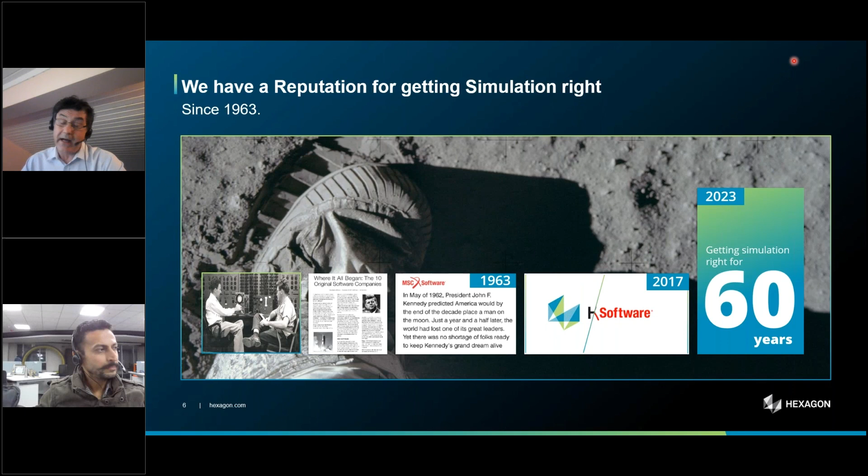If it was 60 years ago, the Apollo program, landing on the moon and getting the people safely on the moon and back, or if it's today to launch a successful product into the market, manufacture it, and operate it in the market, simulation is always there to actually make things successful, and not so much in creating nice, cool, fancy videos, which of course is also quite attractive from time to time.

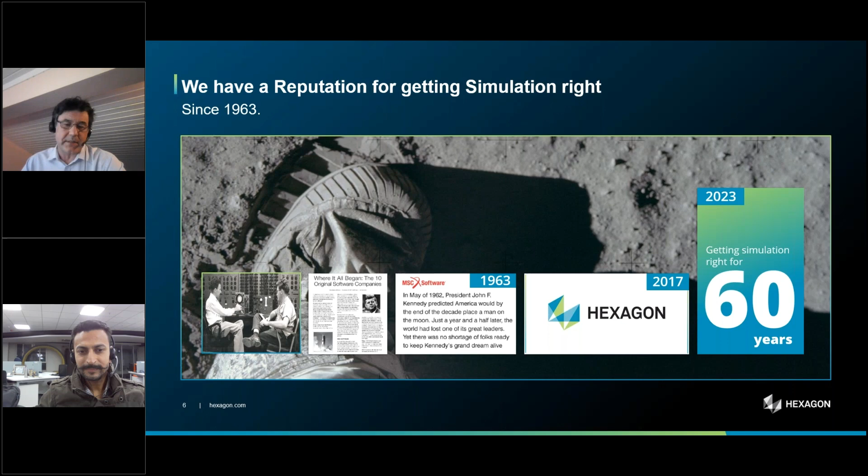Okay, with that, going to the next slide, what we're seeing right here is that simulation becomes more and more integral into the whole business processes of our customers. That means we are integrating into design, into making, into manufacturing, into inspection, and also into operations. What that also means is that simulation, and I'm noticing that in all the dialogues we have with our customers, is getting closer to the physical world.

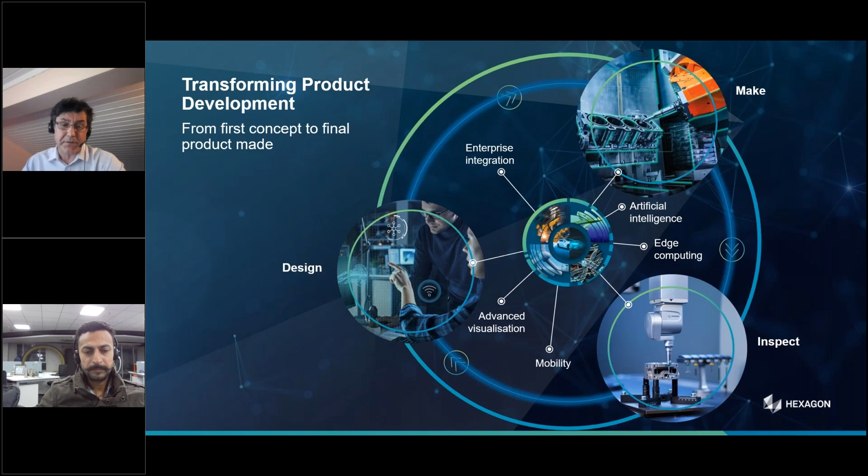It's not anymore something isolated in a lab, but something which integrates more and more with the physical world going forward. And that's something which we are looking into with our ecosystem, which we're building up with Nexus. If we go to the next slide, Ashok. Now, as you all know, Hexagon D&E has a huge portfolio of different simulation applications, which we are bringing to the market. And if you can go to the next slide, there are quite some impressive simulations in very diverse areas which we can do.

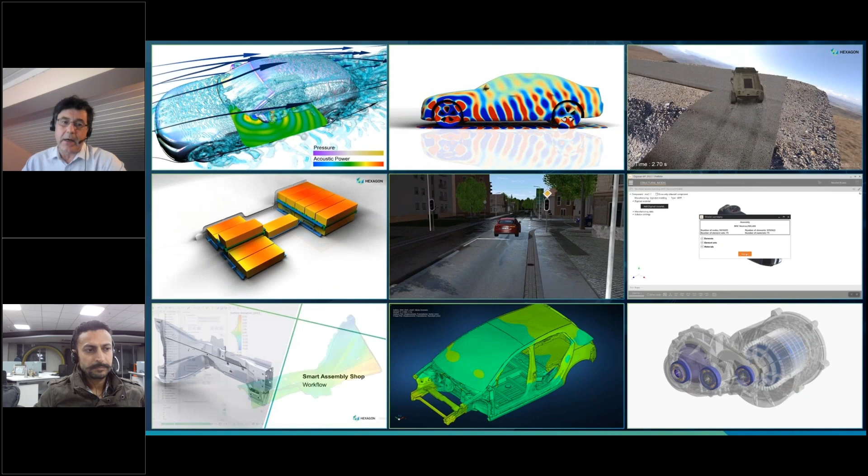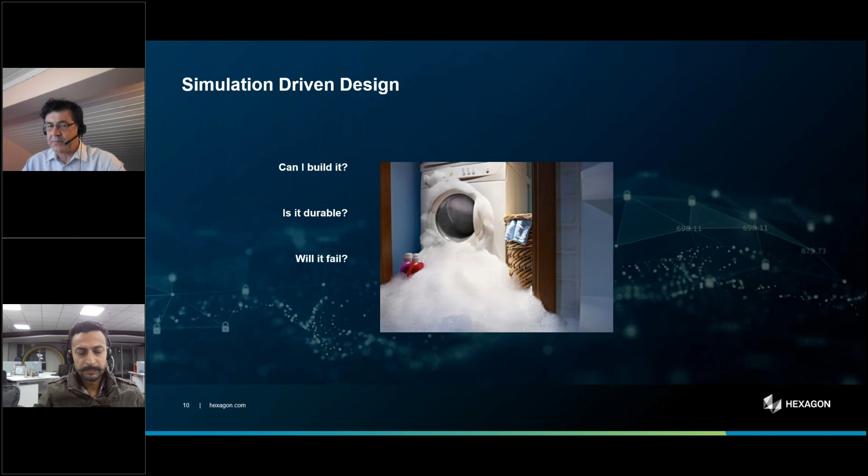Now, this already is one of the key things which I do want to point out. Simulation is actually very diverse because it's answering very many different questions. And we go to the next slide. That is one of the first challenges we see when building a simulation data and process management system. You need to immediately think about the multidisciplinary nature of this application, because it will not be as homogeneous as you can imagine.

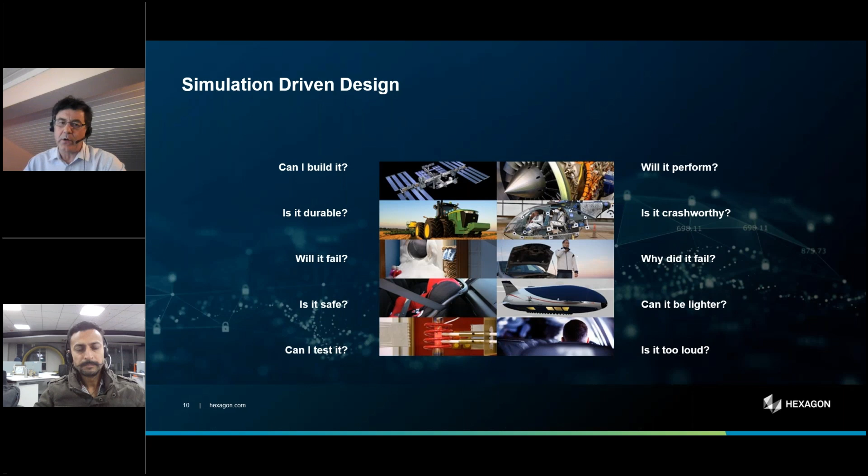Depending on the question, the domain, the application, the workflows you're using, there are quite some diverse requirements which need to be brought under one hood, under one organizational structure. And that's really what we have worked on over the past 20 years, where we had very many successful deployments and where we believe we know exactly what the key points are to make an SPDM system successful.

One of the slides I always use, and some of the people who have witnessed my presentation will remember that slide, I'm always using it, but I do want to point out one key part of simulation within the whole product lifecycle management of the system: running a simulation requires in the manufacturing world two ingredients. It requires from the PLM a requirement or an objective, and it requires from the PDM some kind of information about the product.

It doesn't necessarily need to be the full detailed product structure. In the early concept phase, it can be something very simple. And in the late phases in operation, it can be digital twin information, which you pass as a question into the simulation environments. And then the secret sauce, the simulation magic starts. You simulate results, and then you digest those results as the CAE engineer, and then you pass back into the PLM the answer to the question that was articulated.

And that typically is a pretty small subset of the simulations that you had performed to get to those answers. So what this tells you, and that's something which I think is important in building an SPDM system, is it's not a data structure. It's not a data extension. What it is, it's a transient system which responds to a question, delivering an answer. And that's the communication pattern which needs to be established. And this is really the start point, the input point, and the end point of any kind of simulation process and data management solution.

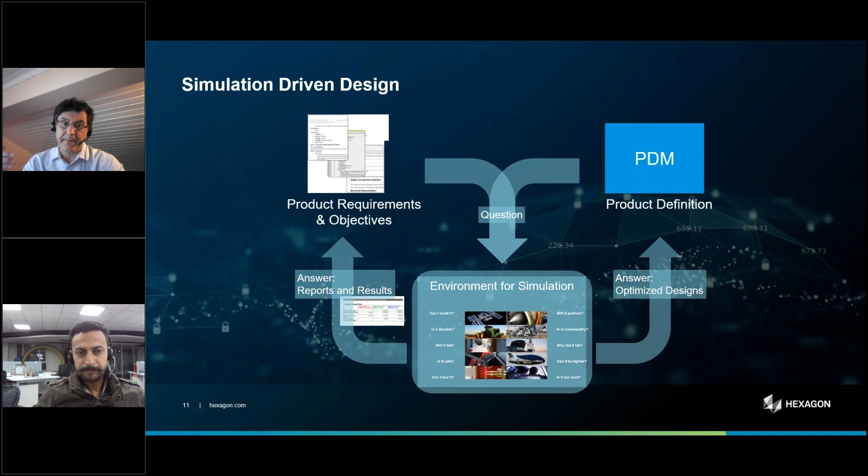Okay, so this is the main part and the main organization. And really an SPDM system is, and Ashok will go in a few seconds into the details about what are the key capabilities that need to be part of an SPDM system to really be successful in answering questions. You notice we are answering questions. We're not focused on a specific application because the questions will get more and more diverse as the system grows in your organizations. Now, before Ashok starts with his part of the presentation, I do want to make one point about innovation.

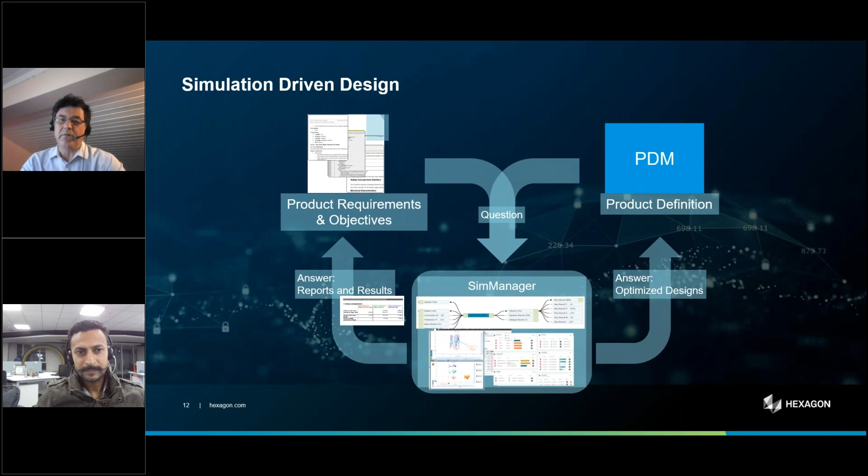Simulation is there to react to design, to react to questions, but it's also there to innovate, to explore. And this is something we are seeing more and more, that as part of the question coming from the PDM, there's an element of exploration, of trying out, investigating alternatives, variants, new use cases, new concepts. Now, you will get more announcements in due course on this topic of massive exploration in the simulation world. The problem right here is that this generates huge amounts of data.

And so even if you are today not overwhelmed by data, the more you tap into innovation as part of your duties in the simulation world, you will get to a point where this is not manageable if you don't have an organizing structural element, because you will just get swamped and buried in all the simulation data that is generated. And that's something where the next generation simulation data and process management needs to pay huge attention, making sure that we do not only deliver a streamlined automated question answering machine, but that we empower at the same time the innovation, the exploration of concepts, of designs, of manufacturing alternatives, etc., and deal with the data that is coming along with those explorations.

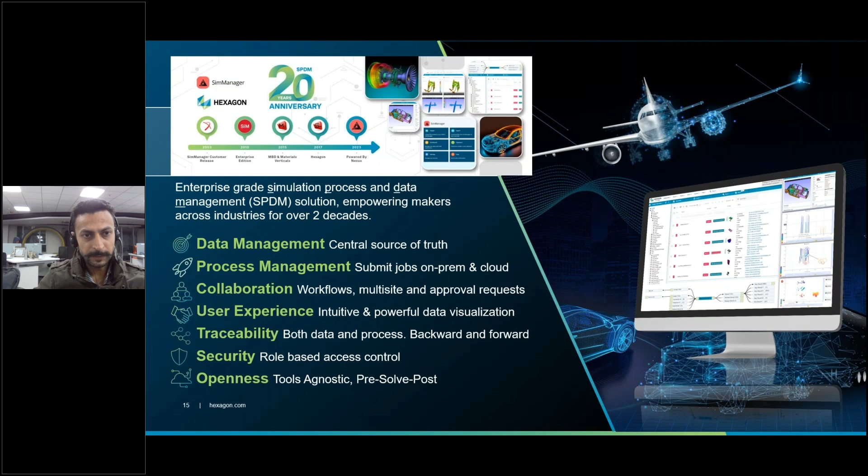A little view at who we have been collaborating with, some references of our customers.

BMW, as I mentioned, started in the year 2000 as a custom solution based on the predecessor of today's SimManager. They kept upgrading, and the first upgrade was in 2012, when the industrialized version of the current system came into being. BMW has been periodically reporting quantified realization of savings. We can go over the numbers, but they vary across all domains of simulation cycles, from pre-processing to post-processing, saving human efforts and organizational efforts.

Likewise, our partners at Audi, another anchor user of the SPDM solution, reported a weeks-to-days reduction in the time it takes them to deliver a new design to a customer—roughly six times more simulation at the same investment cost and effort.

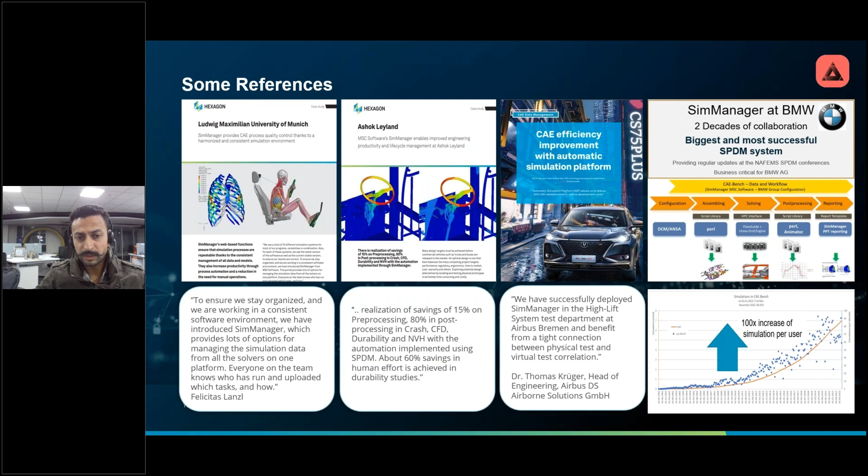Embraer automated their entire aircraft program report generation process and reduced the time from a few weeks to a single day.

So these are some reference indications. Of course, our partners, our customers, and the people we collaborate with span a far bigger spectrum.

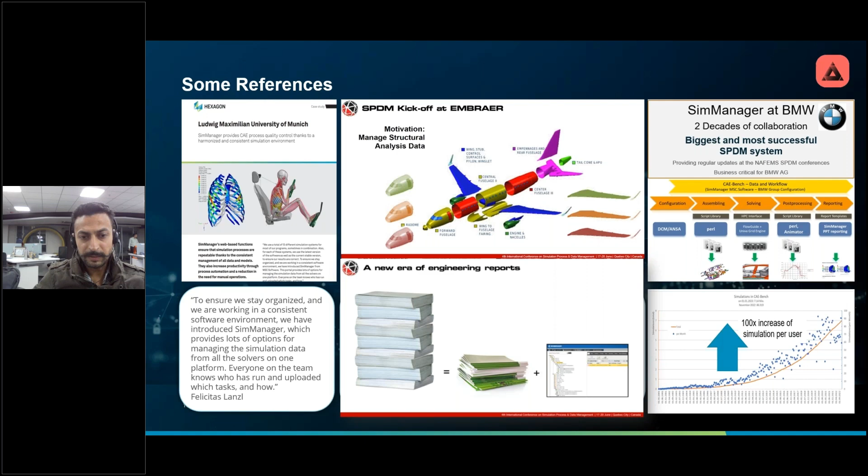With that, let's go over the key values SimManager has to offer. Data accessibility saves you time in searching for the data.

We are all different, so SimManager offers variant different means by which you can access your data. It can be the pedigree or audit trail viewer, which gives you a graphical dependency graph view of your data, with backward as well as forward traceability, list views, tables, search tables where you can search by columns or by types, and category search—if you already know the artifact you're looking for—plus a more general purpose Google-like search.

You remember a certain phrase, a program name or a part number, but you don't know other contextual information. You put in that single phrase and you get the related data artifacts.

Traceability saves time to understand the data. Again, we insist that traceability, both backward and forward, is the backbone of any SPDM system, SimManager included. It helps us understand what, how, why, who, when, as well as where the data is coming from and where it is being consumed downstream.

At the same time, we need smart and seamless import and export mechanisms. This helps reduce the risk of using the wrong data—often a case historically where data is managed more manually.

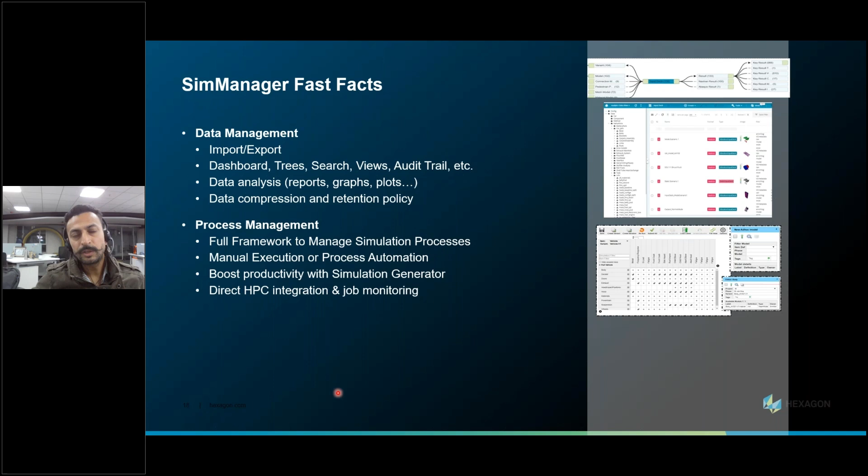With that, let's go to the last bucket of capabilities. That's collaboration. Collaboration between whom and what? Collaboration between people, processes, and data. You cannot have a black box where you have all or none access.

So you need rule-based, role-based, profile-based access rights and executable privileges. Likewise, for the globally distributed team, you need a central source of truth. But let's accept the fact we have network latencies, and how do you take care of that? If I have an SPDM system in Munich accessing it from Pune, Mumbai, or Paris, it might have different latency times and network effects. So for that, we take care of that by offering multi-site capabilities.

This enables having more than one site where the data replication happens on the rule base. And we can also have some satellite sites where the data resides closer to the compute capabilities.

And of course, for all this, we need some task management system, and we offer work request and project overview for that. We need a seamless way of creation of tasks, automatic assignment, and due date reminders, wherein all the required inputs are mandated, and there can be some optionals as well. And we have some key KPIs defined beforehand. If you complete this task, a meshing or simulation, these are the KPIs that are expected out of that.

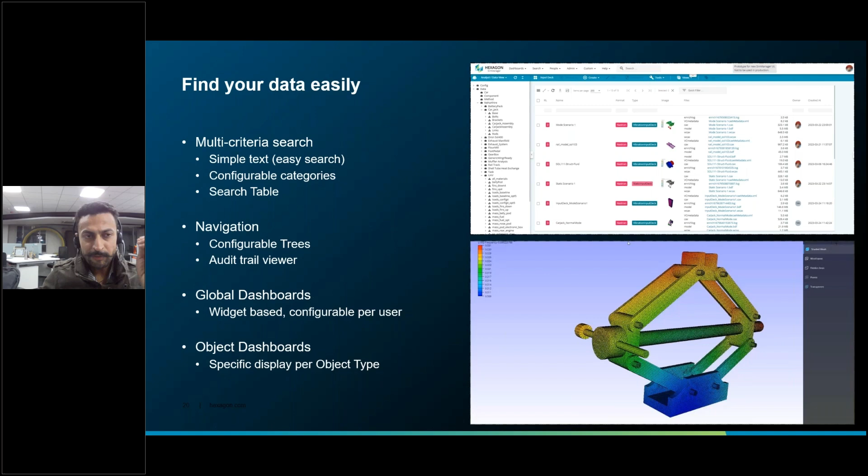And if you have an assembly, as most of the designers and manufacturers do have, you would want to know what particular part has swapped. Usually it would be one part or two. And if it is the same part, has it varied in a particular revision which is being used or not? Needless to say, once you do the extraction of KPIs, you would want very comprehensive plotting capabilities, spider plot, bubble chart, etc. With that, once you were able to successfully find the data of your interest, you would want to analyze and decide what to do next.

A precursor to that, of course, is how do you organize your work? You would need to create the scenarios or the load cases, the different simulation conditions you want to simulate, and define your objectives in the form of target KPIs. The system should allow seamless creation of these target KPIs. Define your load cases, run the job, get the computed KPIs, and match those against the target KPIs. And then you can say okay or not okay. Accordingly, you either optimize your design or go ahead with the production. You also want to create your trade-off studies and define your alternatives, and in the process assess your alternatives across your objectives.

So that is enabled in the form of the object viewers. You get all the required, and don't get me wrong, we offer something out of the box with an experience of 20 years. But if you come back and say, hey, this is not the metadata which is good enough for us, these are very easy to change metadata displays. So no coding, no programming IT skills required, either directly on the UI or with simple XMLs. You would be able to change the behavior of your system uniformly across for all or just for yourself.

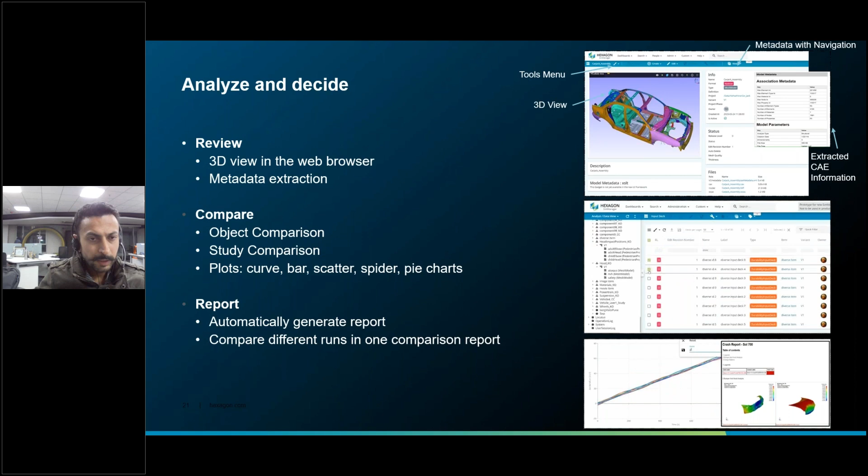Okay, what else do we? Traceability, we cannot emphasize this enough. We have the 360 audit trail from geometry import all the way till simulation report. It gives us the full visibility of the audit of data connections. It can be component, include files, etc. Based on the data extraction, of course, as well as all the way till running the assemble jobs, the solve, the post process, and the report. We need this backward and the forward traceability. Another word for the audit trail is the pedigree. It can be drawn from any given object, and you would know where does it come from, where does it get consumed.

The P in the SPDM is process, and we need to have traceability of the process as well. So we have a process viewer or the process view audit trail that helps you trace all the processes that ran related to a given object, how that object was being created. Was that manually imported, or that came into being by submitting some jobs and out came some output from the HPC, and these are the results and the key results. So you need which CAE tool, pre, post, or solve was used for generating this given artifact, which version of that, and so on, who ran it, when was it ran, etc. So all that is captured in our process viewer.

Okay. This is again re-emphasizing the fact from concept to customer, which is we accelerate the innovation by being the single source of truth. And the SimManager can effortlessly construct the models from the design, from concept design to optimized design, adding the load cases and initiating anywhere from single simulation to thousands, all while enjoying in-browser 3D visualization of models and the results. This is done, of course, with the help of our partner at VCollab.

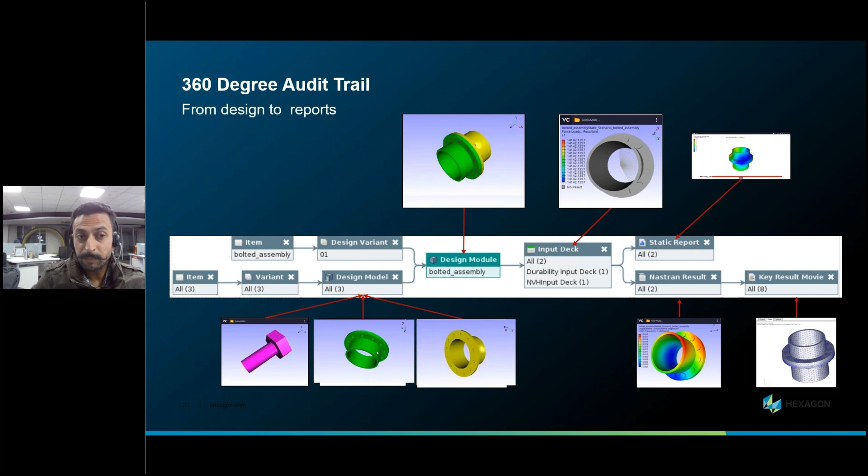Now let's talk about something a little bit more. I already spoke on the process management. This is again an underlying topic for our very next webinar, which is on enhancing your simulation throughput. That will happen next Thursday, but I'll just briefly touch upon what's the spectrum we are talking about.

SimManager can connect to your existing tool set ecosystem. If a tool has to be learned or pushed down to the end user, that in our opinion is not the right way. The tool should be easy enough to be adopted. It should give tangible value to the end user and the business people with business objectives in order to be successful.

So Hexagon has its own CAE portfolio, a wide buffet of that, but we understand the customers can pick and choose the best one of their choices. And more often than not, we see a heterogeneous mix of different CAE tools. Okay, we don't have to name the names, but we know for certain preprocessor what would be the choice in a given industry, in a segment, in a region, etc. And tools like SimManager have to be tools agnostic. It should be easily able to fit into the existing toolset ecosystem. We don't want our presence to be disruptive in a negative manner that, hey, you need to have particular tools from us in order to use.